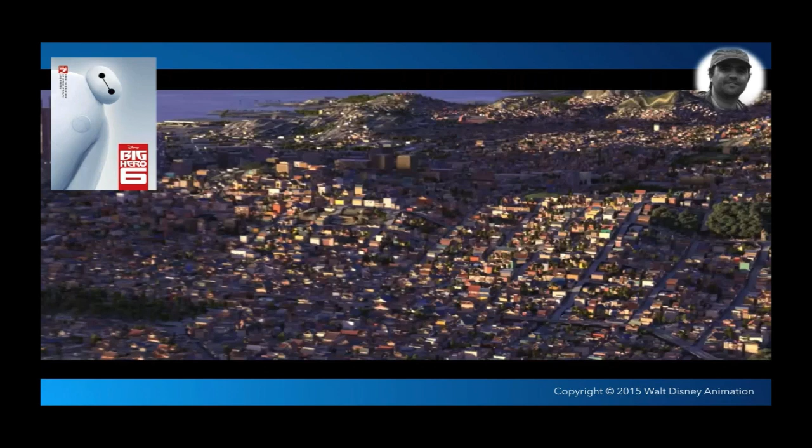CityEngine was also used to populate the areas in the back or in between hero assets. One important aspect of all these environments, apart from their sheer size, is also believability. There's a bit of a similar effect as in character animation regarding the uncanny valley. We are quite good as humans at detecting implausible details of a scene, so it's really important to have believability in urban environments.

Here we see this big hero scene where CityEngine has been used to fill in the space between the hero assets, and this is simply not possible anymore doing it manually, especially if you need to iterate quickly or act on art direction changes. For example, if you need to move a street by a couple hundred meters, you can't move the buildings all manually anymore. That doesn't cut it.

Also in this Zootopia example, procedural techniques and CityEngine have been used to design and lay out parts of the city. So I was talking about tools a lot, and as we are talking about another tool today, I will quickly lay the ground for what tools there are for creating procedural worlds in the VFX and gaming space.

On the general level, we have the traditional tools together with scripting languages. These are extremely widely used today to automate and manage scenes procedurally across studios. If we drill a bit into the pipeline, on the upper end we usually have asset creation, the modeling departments. They use tools like Substance to create texture assets, and Houdini to create simulation assets like smoke, fire, destruction, water.

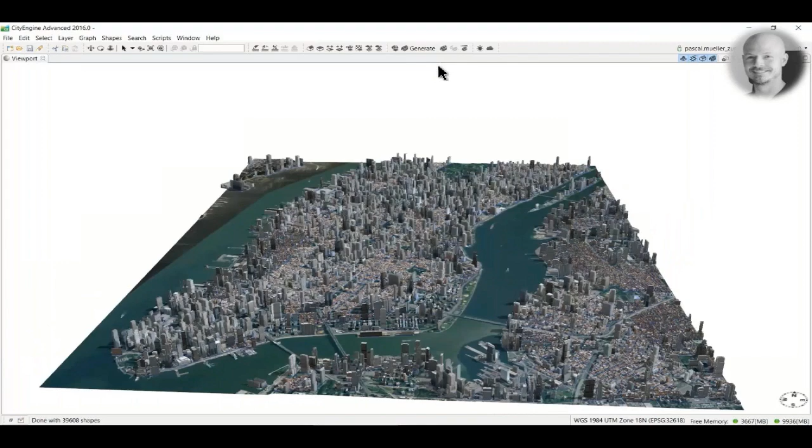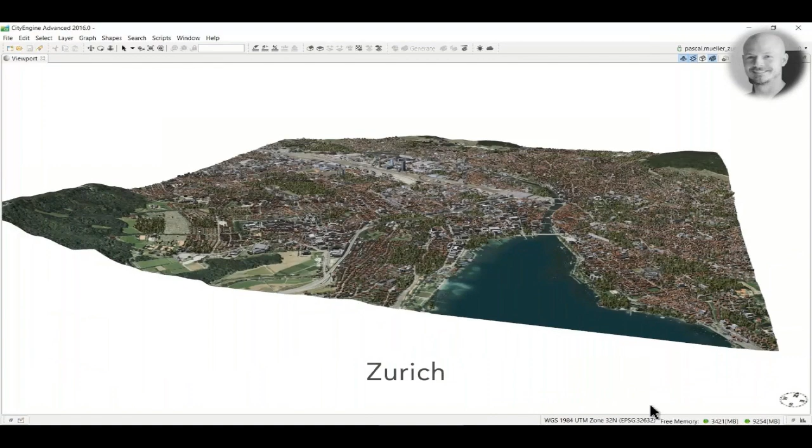So on the other hand, we are talking about CityEngine at this point. Why would we use CityEngine, for example, if there are tools like Houdini? CityEngine has become pretty much the most popular tool to actually design cities procedurally. There are a couple of very specific advantages, such as that it natively supports GIS data - that means georeferenced building footprints, or GIS data in general, or satellite images, or elevation data.

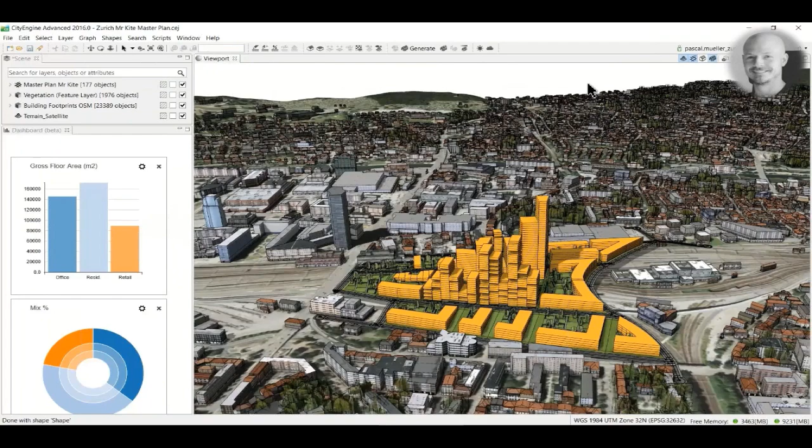Now, a quick word about CGA. CGA means computer-generated architecture, and the mechanism of how CityEngine actually works is quite simple in the end. What you need is a so-called shape. In the top left corner of the image, we see a couple of examples of shapes - there's a single one here.

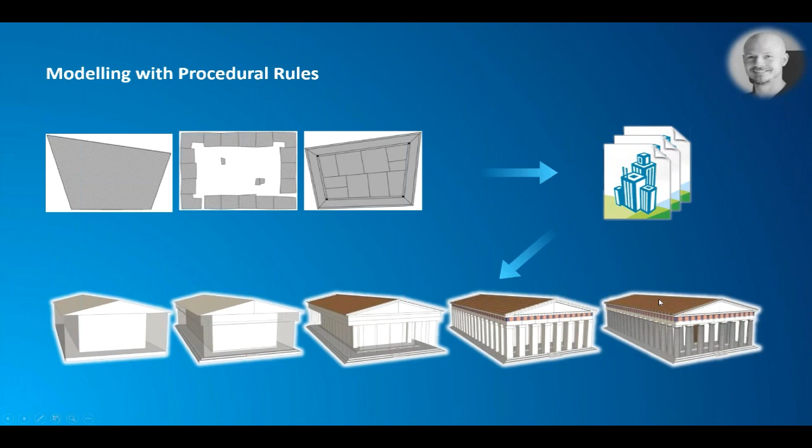Then there's a parcel extracted from a city plan, and then there's a dynamic block taken from the dynamic city layout system of CityEngine. Now, to each of those shapes, you assign a CGA rule, and then you can generate a building, as you see in the bottom half of the image. The more code you write, the further you go with the code, you can generate more and more detailed architecture. But you can think of this also as some sort of level of detail system - you can stop the generation at any point to have either a simpler representation of a building or a very complex one.

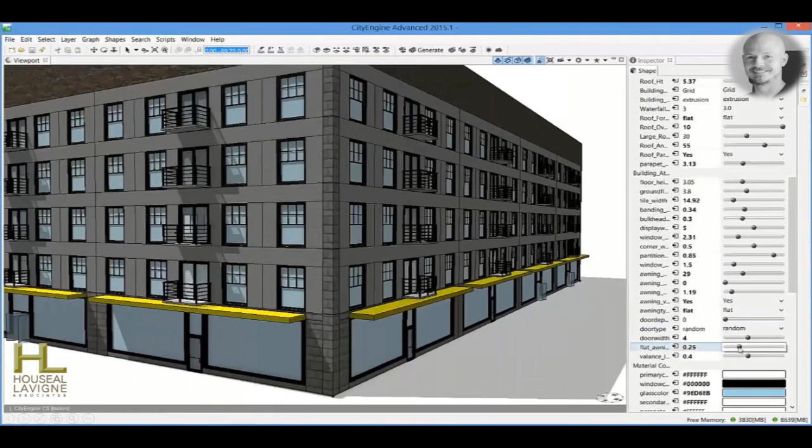Here, what we are seeing is a building rule that was created by our friends at Houseal Lavigne, and as you see, even the awnings are parameterized or proceduralized. If you have a rule like this available, it becomes very easy to generate lots of variation of buildings of the same typology.

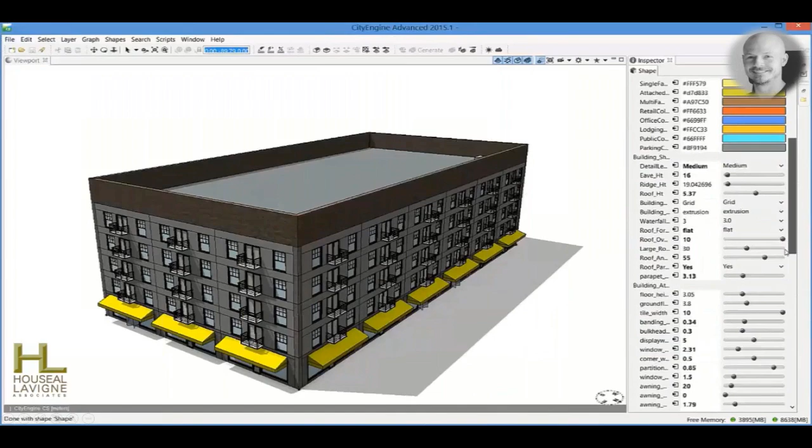Then if you combine multiple different types of rule sets, you can wind up with visualizations such as those done at the city of Gothenburg in Sweden. So all their urban planning projects are basically visualized using CityEngine.

Yeah, then so why would you use CityEngine at all? So we've covered the points a little bit. So Houdini is definitely a very special tool, but still it is a generalistic tool where you can do many, many different things. So you can do fluid simulations, you can do modeling, you can do character animation, and so on and so on. Yet when you are supposed to build a city, it becomes quite difficult because Houdini still is so generic.

So you have to build up a system out of all the atomic nodes available in Houdini to create the building blocks, and in general the system that creates your city. And for pretty much all types of city, you will have to go pretty deep to actually derive or create the system. On the other hand, you have CityEngine that is specialized in the creation of procedural architecture and city layouts. And the big advantage there, of course, you have CGA, which is a scripting language dedicated to the generation of architecture.

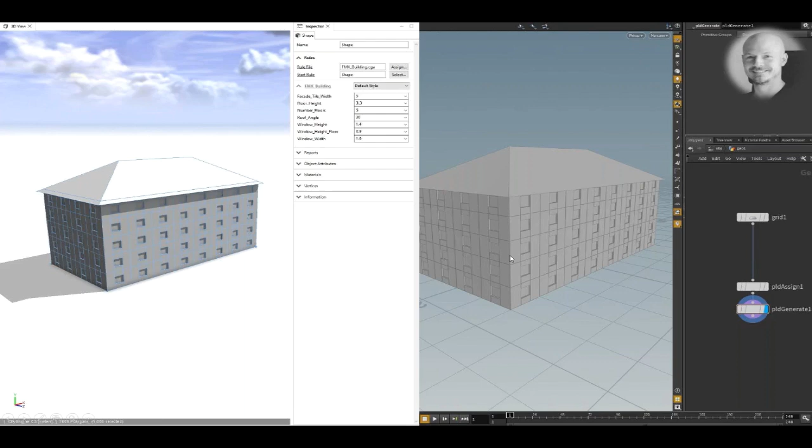Moving on, now we start to see the advantage of having these two nodes. So the PLD assign node points to the rule file and then evaluates the default attribution as we have seen it in CityEngine, and those are then piped basically down into the generate node with those values. Now this is the sweet spot, the sweet spot where you can actually intervene and create an attribute override.

So in this case, I just went in and created an attribute create node with the name number of floors, or number floors. So that's exactly the same name as defined in the rule package. And I said, well, you should have a value of 10. So if you cook that network now, the building will be created with 10 floors instead.

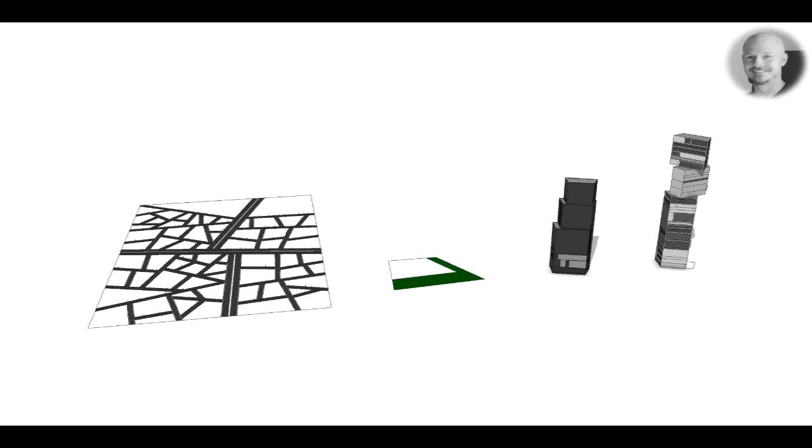In CityEngine, what we created was, first of all, a rule package which creates the block layout. So first of all, it creates first and secondary streets, which then leaves us with some, let's say, bigger parcels or city blocks. The second rule package actually processes a city block, so it can generate layouts for gardens or for where the buildings are placed, and so on.

And then the third rule package generates two types of buildings. The left one here is an industrial building, while the right one, the lighter one here, is a residential building.

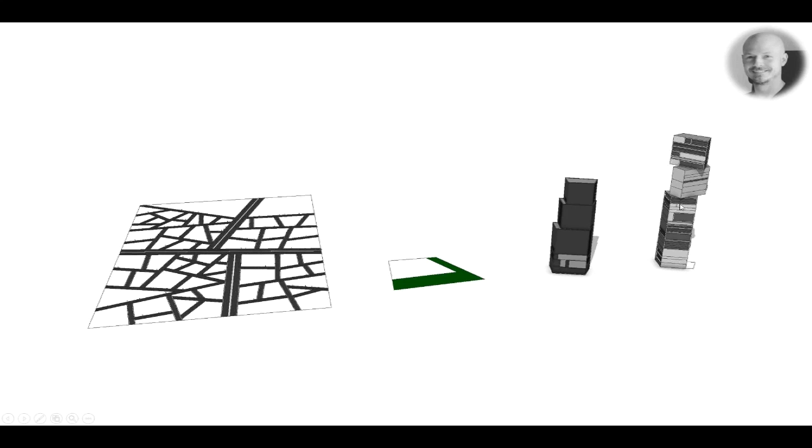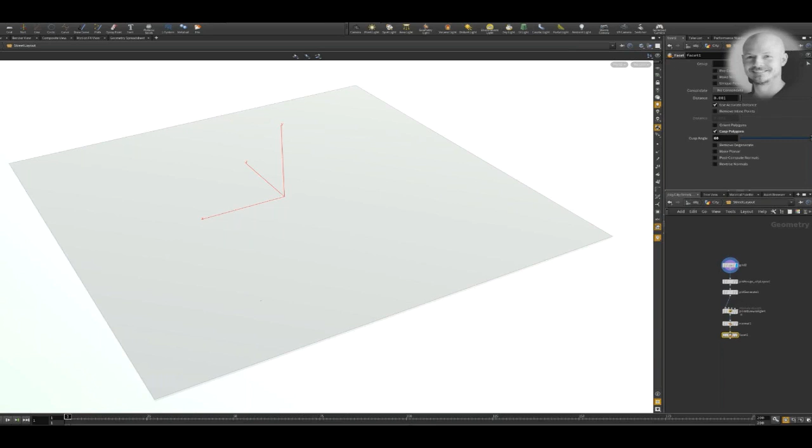Moving on. In Houdini, what we are creating again is a big area. So that's about, I think, 8 by 8 kilometers or something like 5.5 miles square, just as a simple primitive, which we are using in this example as the base for our city model. Very simple. So first rule package is assigned, and it does what it's supposed to do. It cuts the big streets, the small streets, and leaves some space open for public squares and for buildings.

And then, and that is actually the beautiful thing that is not directly possible using just CityEngine by itself, what you can actually do is take the results from one generation phase using Palladio and pump it directly into another Palladio node.

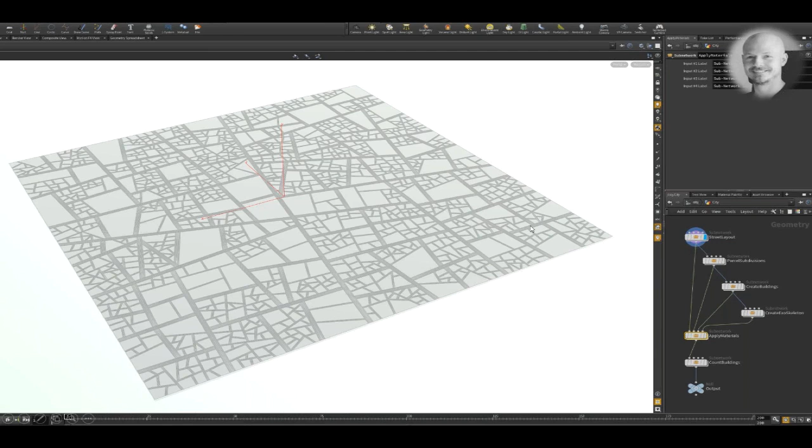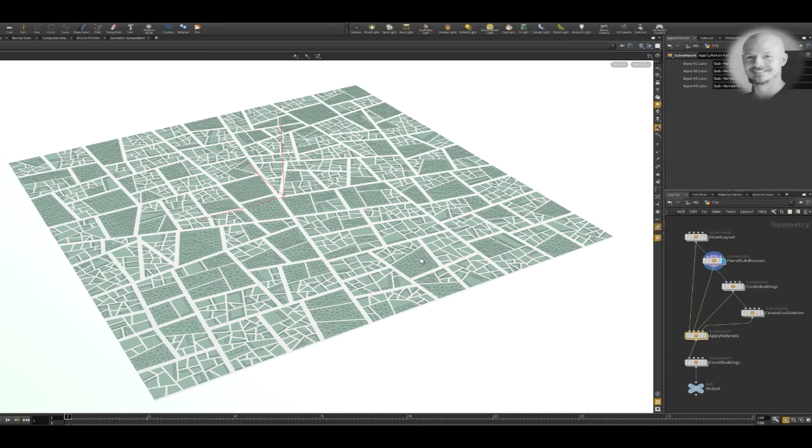So that means you can basically daisy chain multiple phases of generation. So in this case, the open spaces are taken and pumped directly into a rule which creates the further layouts to subdivide those blocks. Moving on, next step with the building positions, the buildings rule package generates the buildings,

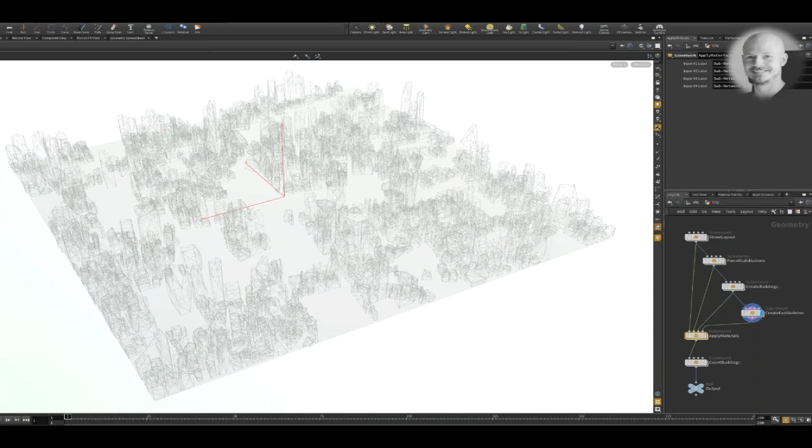and then in the last step, for each of those buildings, we are creating a convex hull using Houdini's native tools, and using a PolyWire SOP, we create the spaghetti going around that convex hull. Combining everything together, all the merged geometries and having the materials applied in the viewport, the scene looks like this.

Okay, thanks, Matt. So let's take a bit of a closer look in these two nodes which Matt just used. So we start again with the Houdini geometry, and then the first node. We call that PLD assign. PLD stands for Palladio, obviously. This is basically the node which assigns the default values extracted from the rule package to the primitive polygons.

You can also group several polygons to form one building footprint, for example, if you have multiple wings in a building. Once you have these attributed polygons, you can then do what Matt demonstrated and modify and override its attributes to drive the whole look of your city. Especially interesting is to use paint effects or simulation outputs to modify your buildings.

The main node is called PLD generate, which actually evaluates the rules, creates the geometry, and additionally emits additional attributes. Those could be CGA reports. So if you're interested in, for example, the gross floor area of a building, or you can also work with material attributes and assign them to the shaders directly. And in the end, obviously, you can do more Houdini things with the geometry. So now let's look at a more complex example, and I hand it back to Matt again.

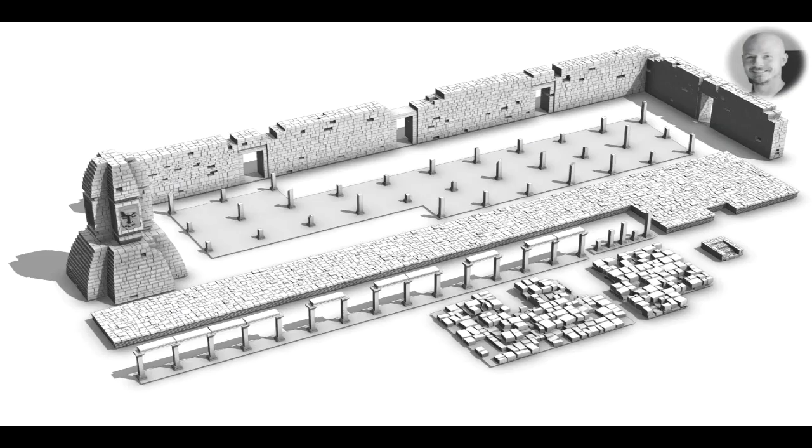Yeah, so I have studied a lot of reference images of this site, and I isolated a couple of architectural elements that basically make up the main structure of the architecture of this photograph. So, for example, what we have is walls with some sort of doorways. We have fields, or let's say areas with broken columns. We have a floor. We have arrays, or let's say lines with intact columns that actually have some beams missing on top. We have some stone arrays. We have stairs and elements like this.

So I went ahead, and for each of those elements that I just mentioned, I created a rule package. Now, actually just two of them have also a little bit of deco 3D assets, like this face here, or it's not really visible here, but at the vertical wall of the floor, basically, there are some cylindrical elements protruding.

So going to Houdini, what I did is I created just a big grid at the beginning that is basically showing the extent of the whole digital set that I would like to generate for this, let's say, shot, quote unquote. Going on, I selected one of the rule packages, which will be the column array. I created manually a selection of primitives where I wanted specifically these columns to be.

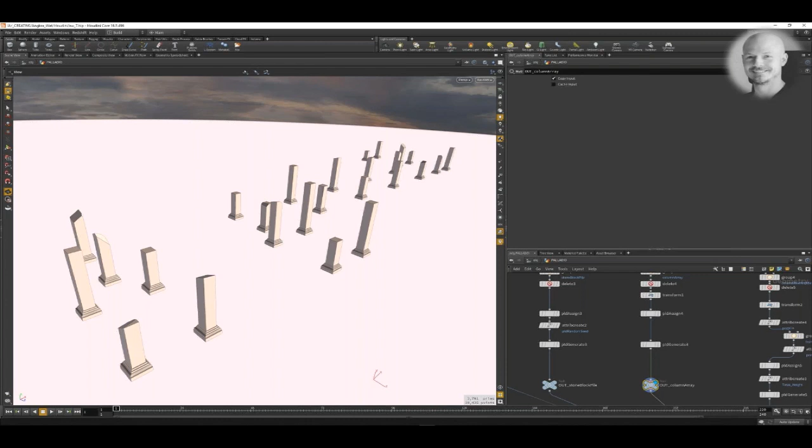Next step, assigning the rule package to that selection using the assign and the generate node, and the resulting geometry that is produced looks something like this. Still a little bit clean for my taste, but let's move on. So using that output of Palladio, I now continue using the native Houdini tools to create, for example, something like this.

Digital asset that takes the output of Palladio and converts it into something that looks a little bit more convincingly like a stone column. So this digital asset contains a network that uses things like VOPs or VDBs and mountain SOPs and so on to create this representation that looks more like a realistic weathered stone.

Now this we are taking as another input for the procedural vines or dry vines, which I just wanted to add on top as, let's say, a deco element or to make the geometries look a little bit more rich. So that's also something that is done quite easily using Houdini. So again, let's just have a look at these steps in the rendering.

So the first step is just the clean output out of Palladio with the architectural columns. Then the next step, using Houdini's native tools to weather the geometries and add some geometric detail. Then the third point, to actually add some of the dry vines.

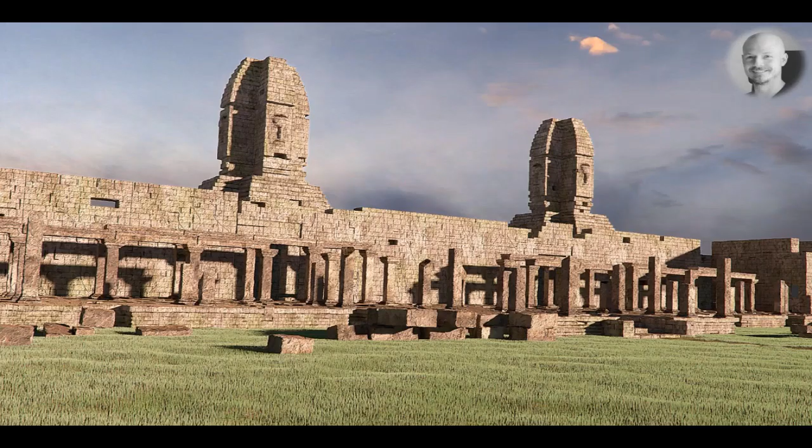Now assigned to all of the elements, the scene looks like this in the viewport. So we have all the different columns, the stone piles, a little bit of grass and so on, that make up this finalized scene. Just a quick rendering or two here. The first one a little bit from further away, and the one that is more close that actually shows all the little detail added on top of those procedurally generated geometries.

Now, obviously, you start to see the advantage of using the combination of the highly specialized procedural system that can generate pretty much arbitrary types of architecture using CGA or rule packages, but then also processing those geometries using the native Houdini tools where its absolute strengths are and where CityEngine is limited. So it's like combining the best of the two worlds.

And basically none of these columns that you see here have been modeled or sculpted. Every single column is absolutely unique in its geometry. So therefore, it almost becomes like the layout artist becomes somehow the modeler. So it's really, really fascinating. But yeah, let's go back to Simon.